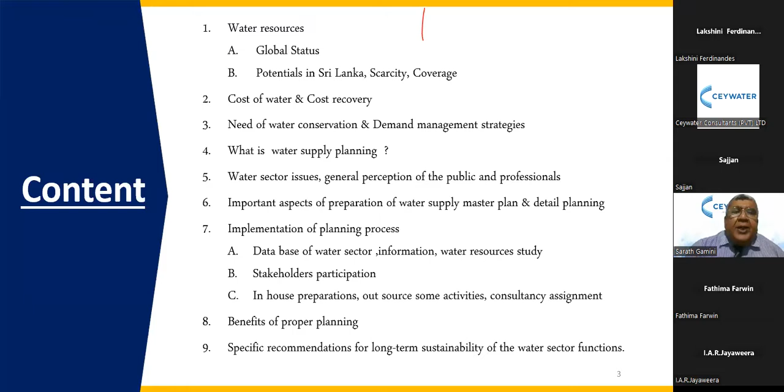I'd like to touch upon a few topics: the global situation of water resources, the Sri Lankan situation, then cost of water, cost recovery, and water conservation demand management strategies. I'll also cover what water supply planning is and how I look at it, then sector issues and people's perceptions, the important aspects of preparing a master plan, detailed planning, implementation of the planning process, the benefits of proper planning, and specific recommendations. So next we'll start with the water resource aspects, the global situation.

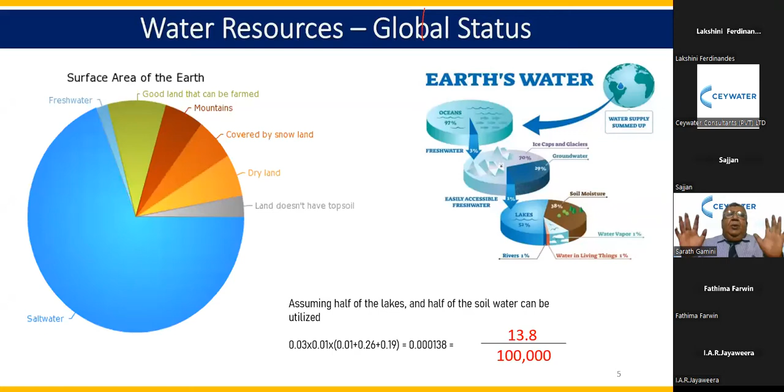There is ample water on planet Earth, but if you consider the total volume, 100,000 units, 1 lakh units, what is available at an affordable, reasonable price is only 14 out of 100,000. If you use seawater there's no shortage problem, but it involves 3 kilowatt hours and costs, on a Sri Lankan scale, about 200 rupees. So the global situation is also not so attractive.

Now let's come to the Sri Lankan situation. What we get is about 121 BCM, billion cubic meters, from average rainfall. Effective surface water used is about 50 billion cubic meters per year. For the water board, taking a sample, about 0.9 BCM is required at the moment, and in time to come it will be 2.4 BCM.

It looked like about 5% is sufficient to cater, but it is not so. There are some districts with severe water shortage. To explain with facts, I have taken the Mahaweli River Basin. Water Board has requested 500,000 cubic meters per day from Mahaweli, but they have given approval for only 300,000 meter cube per day. You will see the deficit. We have to find a way if we wanted to implement this. Mahaweli River flow at Peradeniya goes below 350,000 meter cube per day. So we are asking for 500,000, but on certain days it goes below 350,000. So in our country, we have a shortage of water, right?

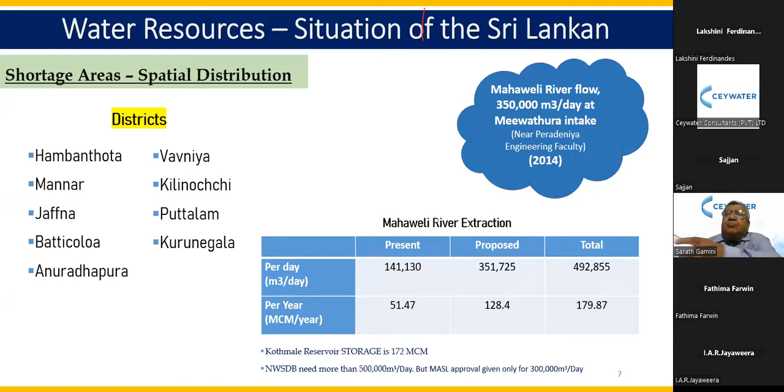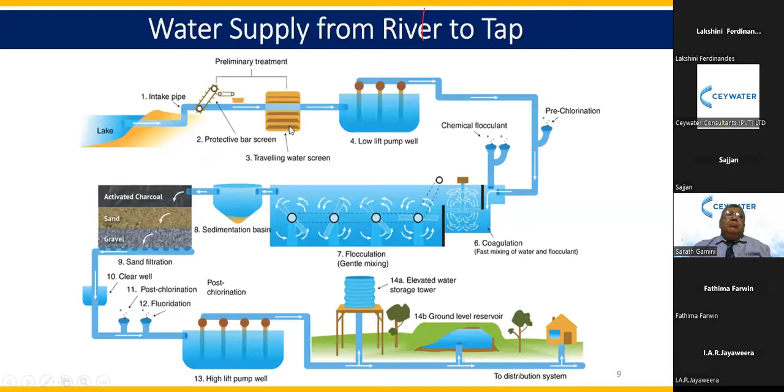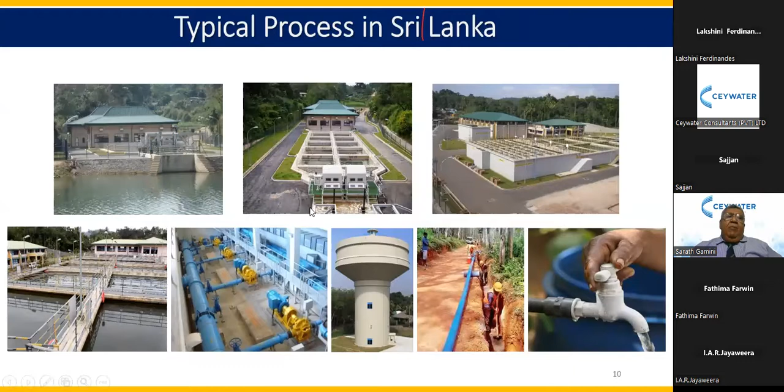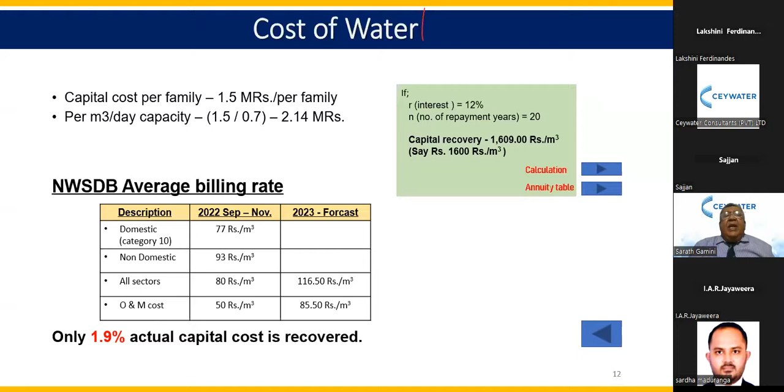That is the cost. So where we are - average cost recovery status. Very recently we increased the tariff. Before the tariff revision, the average billing rate - total bill value divided by quantity - was 80 rupees. We were charging 80 rupees. Now we expect 116 rupees going forward. But our O&M cost alone is 85 rupees. So we are recovering only 30 rupees towards capital. That means less than 2% we are recovering. In summary, we cannot recover the capital cost - only 2%, right? That means somebody should bear the costs. Entire Sri Lankan people should bear the costs. That is the background I am thinking about, and I am inviting the attention of planners. That is the status of water sector cost recovery.

So this is about the background, breakdown not required, so we'll go to the next slide. When we have a huge cost recovery issue, investments are rare or very limited. What should we do? In the planning process, proposal stage, we can propose demand management strategy. Another option is supply oriented - generally we have done supply oriented measures, like building more lanes and highways, similarly we can give more and more water supply. But our issue is we are short of capital and we cannot recover costs either. So we have to think of water conservation measures - demand management strategies are required. So that part also was in my mind when I was preparing this.

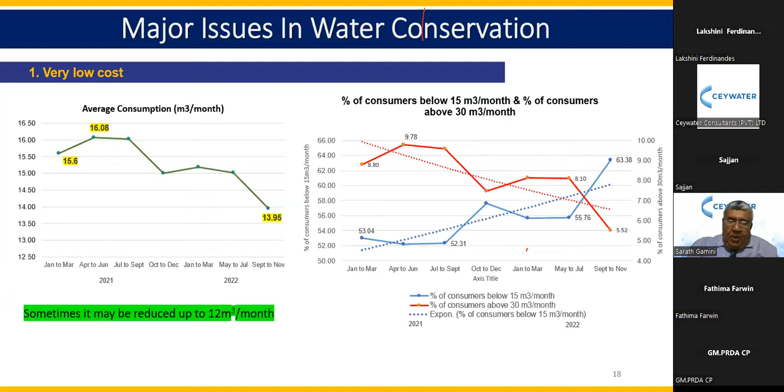So 76% domestic sector - mainly, the majority of water quantities go to the domestic sector. So we have to concentrate on the domestic sector, where it goes. Can we manage? Can we apply demand management strategies? How can we help people come forward and assist? The issue is that currently the average billing rate is very low, as I mentioned. Even after revision, for consumers using 15 meter cube, we are charging average 100 rupees per meter cube. Now overall average billing is 116. After the recent tariff revision, we observed that in 2021 average consumption of Sri Lankan families was 16. With this tariff increase, it has come down to 13.95, and with the latest revision it might go down to 12. Our senior managers found that the number of consumers consuming below 15 cubic meters per month was earlier 53%, now it is 63%. So demand management has already been enforced because of the tariff revision. But can we increase tariff alone? We may not be able to achieve it because there are other issues.

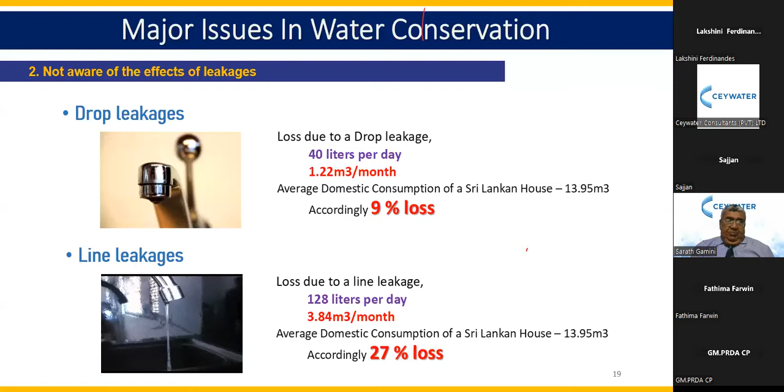So we have studied, Water Board has studied, where we are and why they consume so much. Below 15 cubic meters, 63%, then above 15, also 36% - a considerable amount of people. Mainly you can see drop leakage and line leakage. In the domestic sector, 9% of loss is due to drop leakage. If you compare with average Sri Lankan consumption, it is 9%. We have such drop leak and line leakage per month, and that is a huge amount - 27%. So these things are happening here.

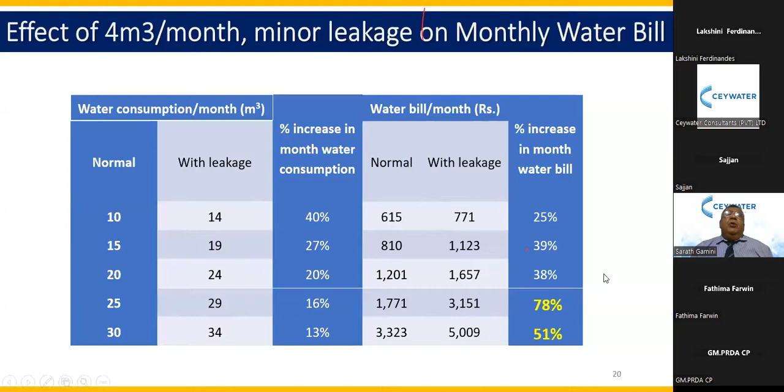So we have studied the water board, especially the steps they have taken to find out why water leakage and such losses occur. Two major reasons: poor quality water fittings—in the market you cannot find good quality fittings—and poor plumbing practice. The water board has taken a lot of action to make quality goods available in the market, so regulatory measures are required for water equipment.

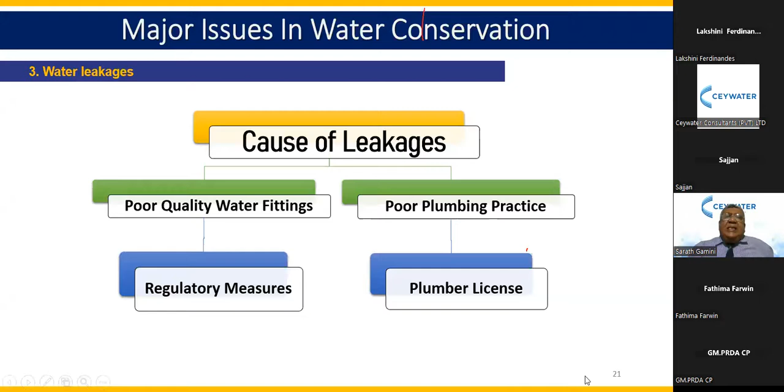So now it is being implemented. Plumber licensing also, with CIDA and other agencies, the water board is taking care of. These are the demand management strategies currently being implemented, to assist the consumer to reduce further consumption and minimize the losses.

Now one can say that per capita consumption, yes, we have to reduce definitely. Leakage, number one, then mitigating bad habits, that kind of thing. And the most important one, I was thinking to share with you all this evening, is what happened to our rainwater system.

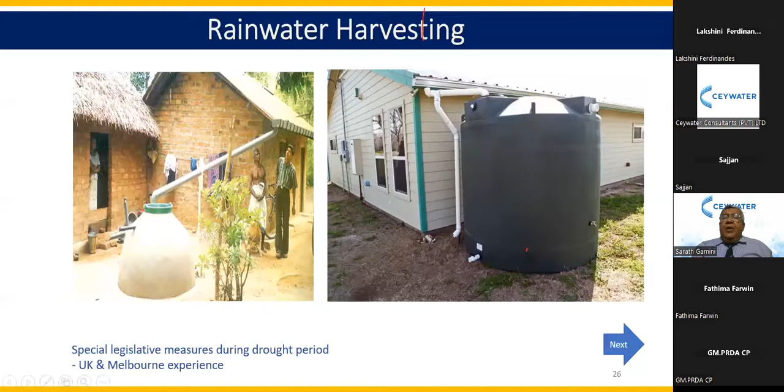We have been using rainwater, right? But in our country it is not compulsory yet. In UK, Melbourne, and Australia, it's compulsory—they have to store and effectively use it. So as an alternative, supplementary source, then shallow well, then hand pump well.

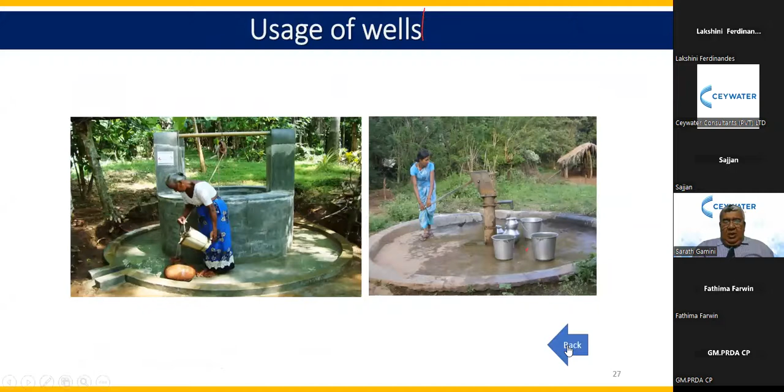So still 50%, we have to increase, say 50% or say 42%. So still we are looking for supply provisions, so we have to think of supplementary sources.

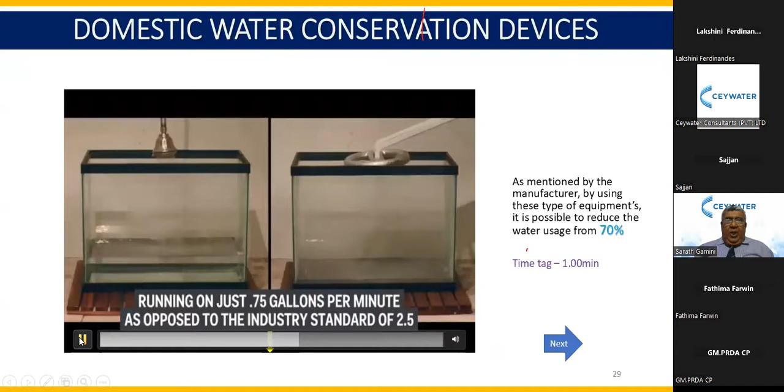Next item, I would like to share some of the things about water saving equipment. It looks like we have not seen this in our market, but the manufacturer says 70% of bathing water could be saved. So there are water saving equipment available in the world market, and we have to think of those measures.

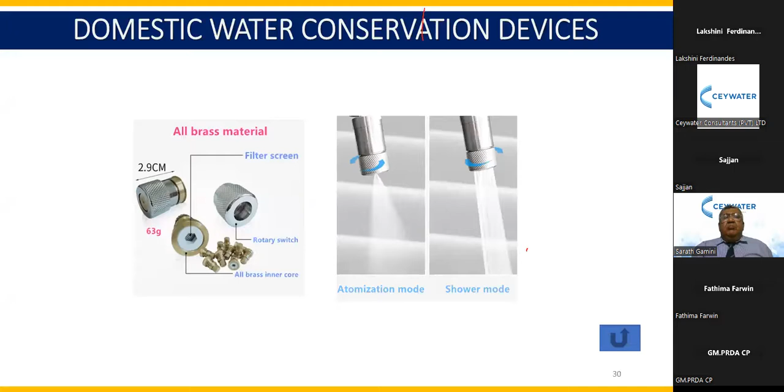One such thing is the atomization mode. Simply we can add a filter screen with a rotary switch. That's possible—this is a simple device.

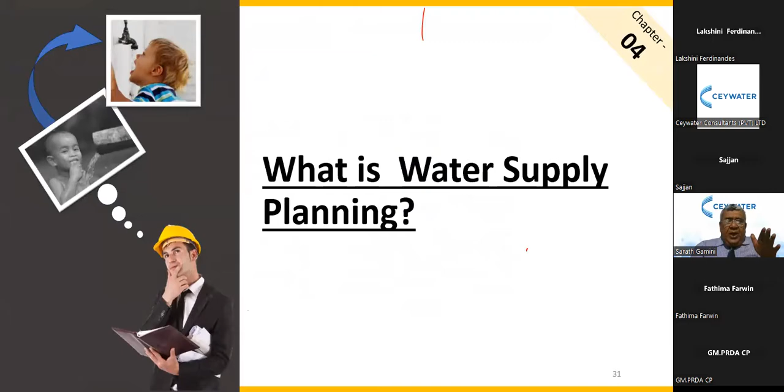So we have to encourage demand management strategies, conservation of water. Right, so that is what I mentioned right from the beginning. We should keep in mind that supply-oriented measures are limited due to various reasons, as I mentioned at the beginning. So demand management strategies should also go parallel. That is the background.

Now I am trying to go to the main topic. What is a water supply plan? There are so many definitions, but what I will say is it's a process—planning is a process where we need to give potable water to the people, ministries, industries, and various commercial institutions. It involves a lot of action.

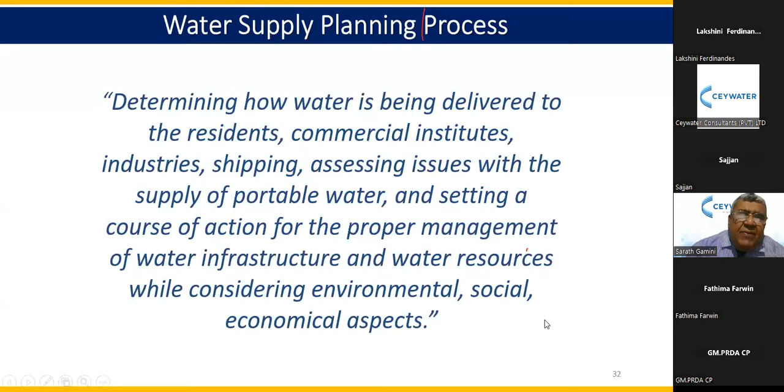Water infrastructure and water resources are to be developed and maintained, providing water supply while considering environmental, social, and economic aspects. So this is the definition—there are many definitions, but I have selected this one. It will have a lot of activities.

A list of activities—I just list out the majority of them. Demand projection and served area: we have to give water, how much, what are their needs. Everybody cannot afford piped-borne water. Then existing water sources.

Additional water resources required, then water treatment aspects to decide the treatment—what data do you require to collect?

Then energy, renewable energy use, community awareness and getting them involved, conservation measures, water loss reduction, water conservation, quality and quantity, cost recovery, long-term sustainability, low-cost solutions, asset management. All those things are involved in this planning process in some way.

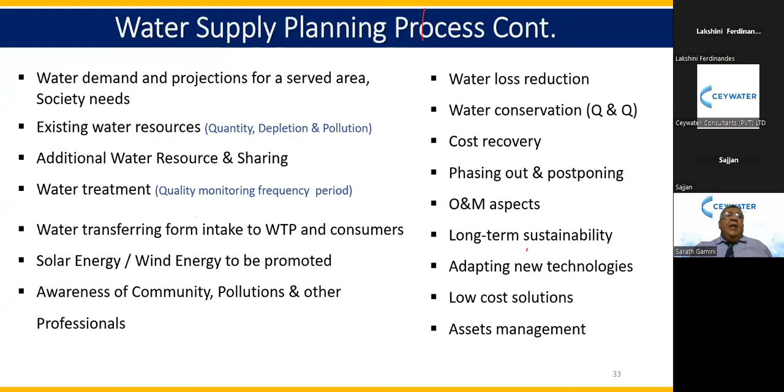So that is the important part—various activities and measures are to be considered for planning of water supply. Now, where are we? Water sector issues—I'd like to share some of the issues so that you, as a planner, can understand how we should react, how we should study these issues, and overcome them to give proposals.

Water resources, growing demand: we have surface water, groundwater, rainwater, reclamation, and seawater also, but that's quite expensive. On the other side, we have the issue of very expensive water resource development requiring huge investment. But groundwater recharging aspects should also be considered going forward.

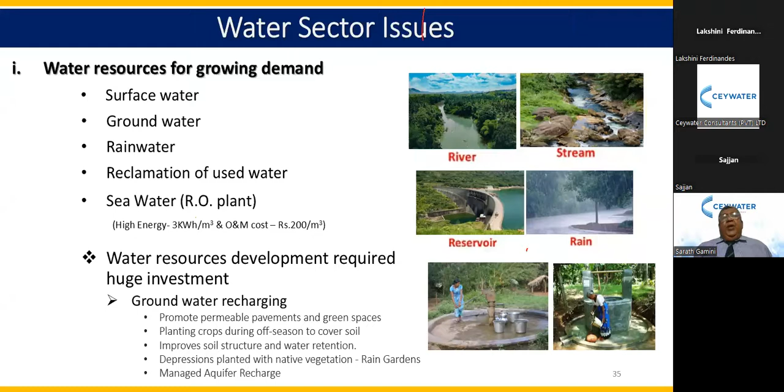One issue is the growing demand we cannot meet, so we have to think about recharging and soil storage improvement. We have to select one of these options: surface water, groundwater, or rainwater. So we have a lack of water resources as well as development—we have a shortage. That's a major issue in our country.

Then lack of capital, as I explained earlier. Then poor cost recovery - 1,600, but we are recovering only 160.

Then water losses due to various reasons, including water losses in the consumer premises. We also have an issue with water sharing with competing users.

Legislation methods are being processed now. There's less information and data on water resources - we don't have quantity, quality, good quality database. This is one of the major issues.

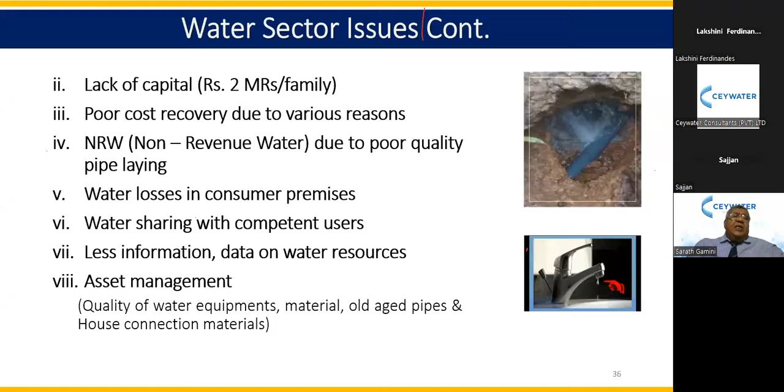Then asset management. Now we have some attention, but generally it's lagging as a nation in asset management. That is the sector issues and background.

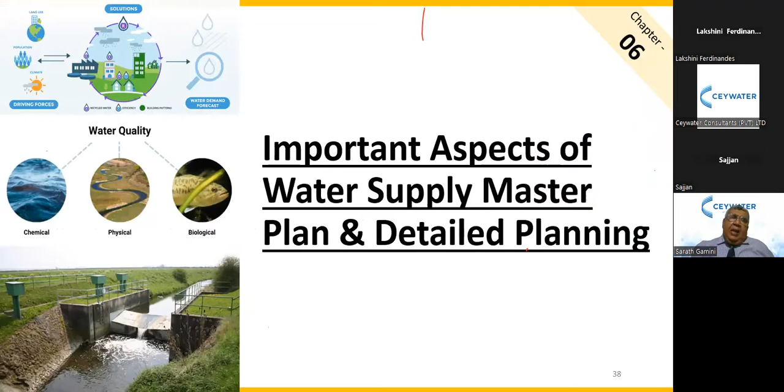Then per capita consumption - a few thoughts. Now those days we used to take 180 liters per head per day. We were studying this in university also. Now, remember that we are going on demand management strategies.

We don't have money to design and implement an overcapacity. We are trying to monitor the consumption. So we have to use existing billing data and allow for NRW, calculate per capita consumption, institutional demand, etc. So we must have a good database.

Planners should have access - those data should be published. Then served area, as I explained earlier, everywhere we cannot give water. Service level also has to be decided.

For example, taking my project, the Canino water supply project - there are hilly terrains, so we have isolated pockets where we cannot give water from reservoirs. We can give it, but you need an additional booster, which is very expensive for small families. So what are the possibilities that we could provide water supply?

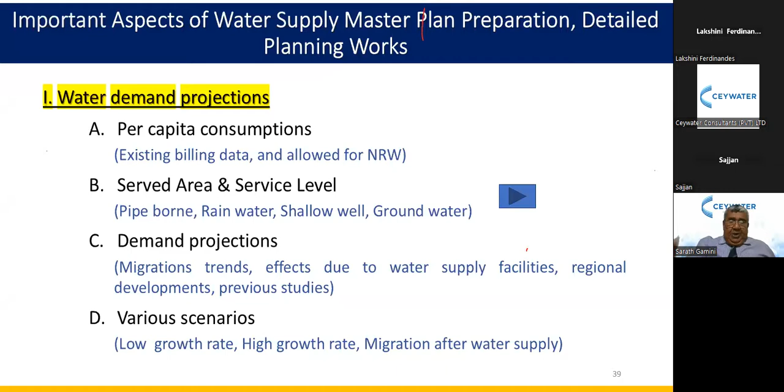So my recommendation is, as planners, with the assumptions and available data, you do a prediction and record it, and allow decision makers to select, or we recommend it. There is no other way. By doing that, you will feel how important historical data trends are.

We need a water resource inventory - quality and quantity data, and groundwater also. Because if we are going to do planning in one year, we cannot do it - we have to have resource databases.

Then quality and quantity monitoring, very essential - river stream gauging stations. There are a lot of dams across various streams and rivers, so why not have gauging stations? The irrigation department is not bothered, so we have to have our own stations.

Then next one, water resources already being used. When you are proposing, there are other users - farmers, electricity power generators. So a sharing mechanism is required, and sometimes we may have to pay compensation.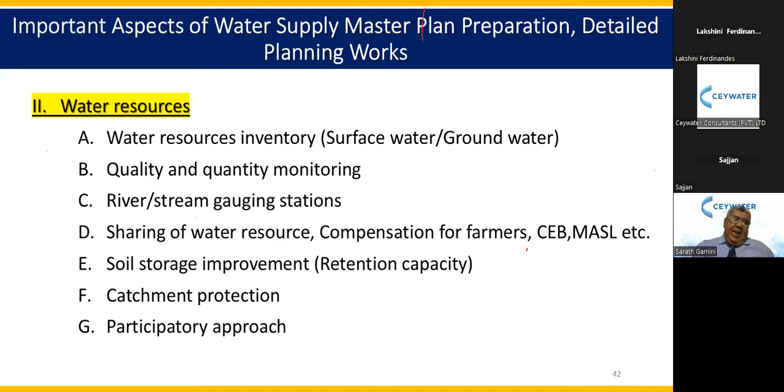We have to adjust ourselves. Then soil storage retention, soil storage improvement when you say water resources, then catchment protection and participatory approach. So when you do planning, we must not consider it only hardware, software part. Soil stage improvement, catchment protection, and we have to do it with a participatory approach. Those things we recorded and put in our report as evidence that the planner has done their best to come up with the recommendation and conclusion.

Then detail one, intake. Recently I was asked for a few comments about the intake. If you finalize the source, location of the intake, it's very important. We'll take this one, Mahaweli, somewhere here, we have to find it. Most important part is water should be available - dry season, rainy season, flood, dry season, whether the river goes to this side or the other side, and pollution threat.

Remember, the biggest polluter is the solid waste dumping yard. Very unfortunately, solid waste dumping yards are located close to reservoirs, rivers and streams. So pollution is not that simple to treat. Sometimes they won't treat it. Then industrial discharge, agrochemical pollution - all those should be considered when selecting the location.

Then if you go for the dimension and type, you have to spend a little money. You have to do hydraulic analysis, physical models sometimes. We have to spend money to do a quality job. We have to do it sometimes in advance - we may not be able to complete within one year. Historical data we have to collect, river meandering, changes.

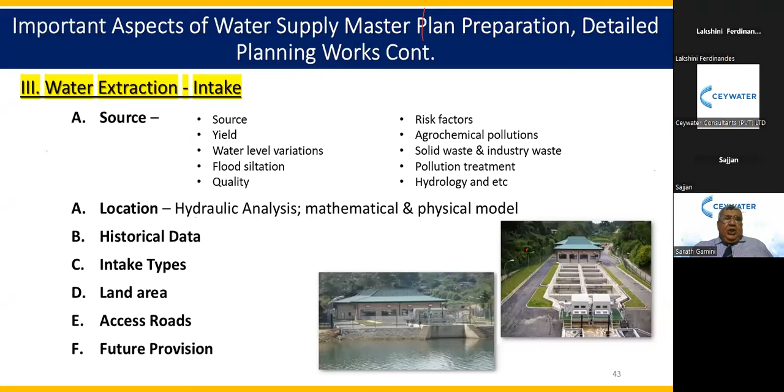Then water treatment plant. To decide the type of treatment, you need quality variation data - it's not just a couple of readings. We have to monitor it, especially high turbidity, its frequency and duration, whether it is 5 hours or 10 hours, whether this comes once a month or once in 3 months. Those quality variations are required - it's not only for one year, we have to study for a long time.

So we have to have our own database, easy to access. Then we have to have a database. So to do the planning, we have to - the institute itself has to collect the data and store it, and it should be available.

O&M aspects - now we feel that we have technology and had to introduce high-tech. Cost of maintenance, repair maintenance, reliability - that's all also to be considered. Then type drawing use, it's good - we can use type drawings, but as mentioned, previous type drawings, we have to review depending on effectiveness.

Then land area - we have various treatment plant types, right? Slow sand, you can go up to the plate settlers, chemical treatment. So area is varied, so we have to select the investment required and the land requirement. Then sludge treatment I just mentioned because now EPL has to be obtained. So these aspects to be considered. Always keep future provision.

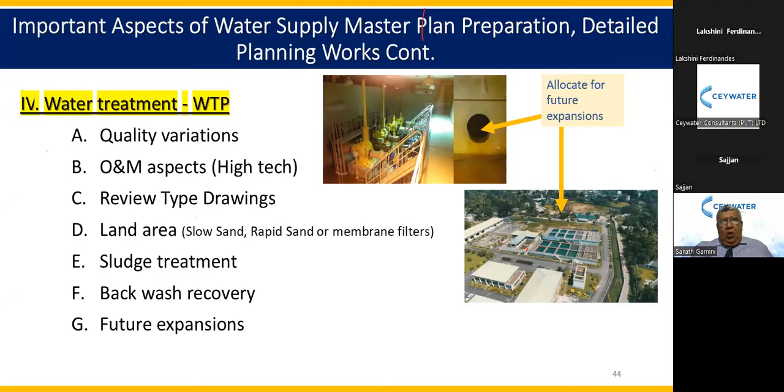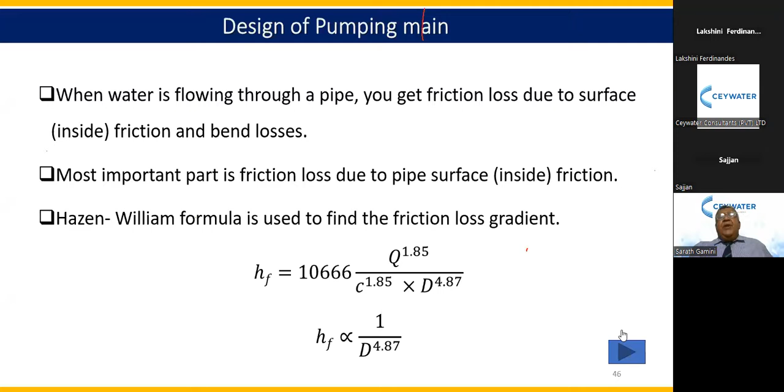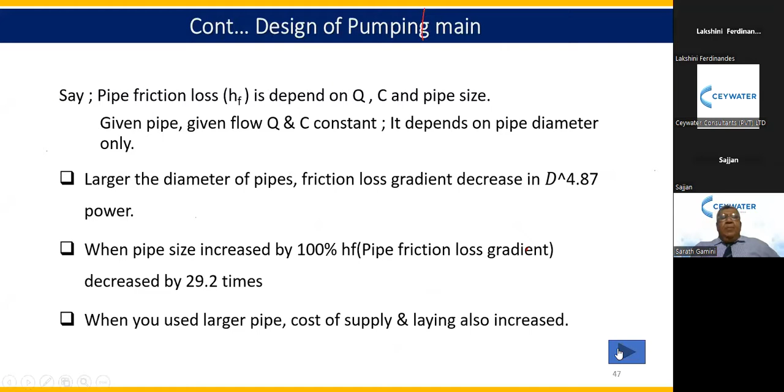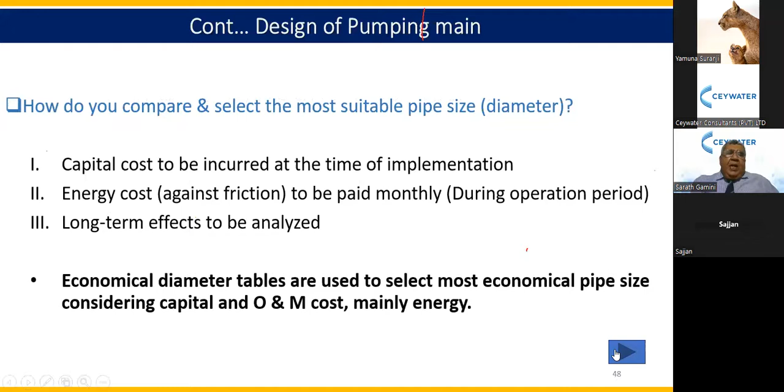At the same time, capital investment is high. But capital investment comes right from the beginning, while friction loss and friction energy come later. Then, sometimes if you increase the diameter double, you can reduce the gradient by 29-30 times, so that is not a linear relationship. So how do we compare? We have to develop such tools to apply to find the best investment value for money. So capital investment comes right from the beginning, but O&M cost will come later.

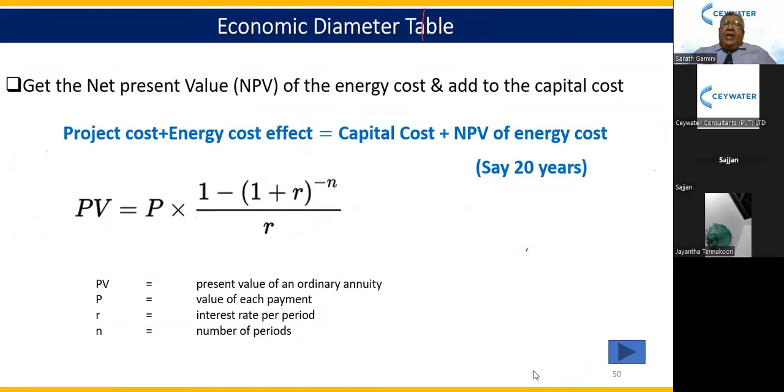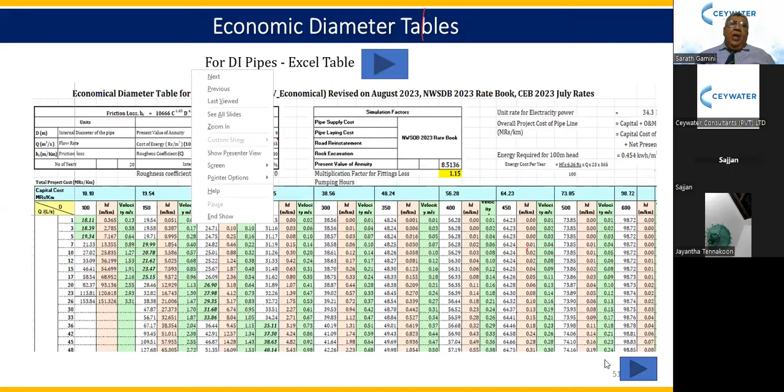Then compare the accuracy of the data. We will do a sensitivity analysis. We are not going to give an A-level paper answer. We have to see what information we have collected, accuracy, sensitivity, variation, and decide yourself and recommend with reason.

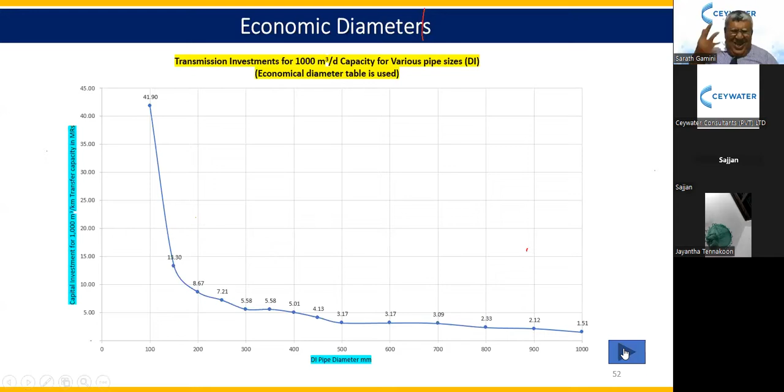Due to time limits, I've given a small theoretical graph. This is investment in millions for 1,000 cubic meter per day capacity, function of capacity, so investment per kilometer. It's gradually decreasing from 100 millimeter diameter, 41 million, down to 1.5. Just to show you, the larger the diameter, the carrying capacity is extraordinarily high. Keep that in mind, since going to the next diameter is not a big cost.

This is a table where I'm trying to show how we can get the value for money. Do the calculation. I've used that formula, and for a particular pipe diameter, you get the friction loss gradient, velocity, energy, NPV, then capital, and total as the last column.

Are we going to install 100 or 150? Sensitivity analysis needs to be done, whether we should go to the next diameter. What is the cost of laying really? Road damages, if you go to the next diameter, what will happen? This is just only 1.5 million in repair, so planners should think twice.

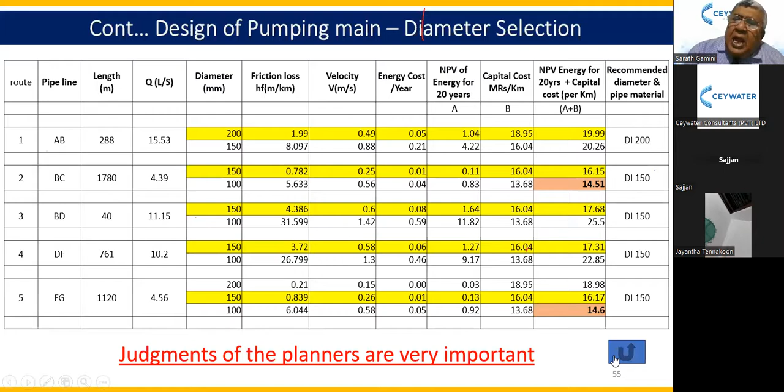Use expansion probability. You must think about various scenarios, and finally you have to do the recommendation. That is enough to highlight the role of the planner. This is our time; people are waiting.

Keep future provision, especially for transmission. Having a second line in the pipeline is simple, and consider alternative routes. When you are proposing a pipeline along a road, think about alternative routes also, since sometimes small gaps are there beside the road. These are the alternatives we should consider, rather than going on the main road, try to avoid it with alternatives.

It is not only the pipeline reinstatement cost after construction; it affects society, traffic jams, all that. If you have data, we can calculate. So the idea is to think independently, consider all possible sensitive scenarios, and weigh and decide.

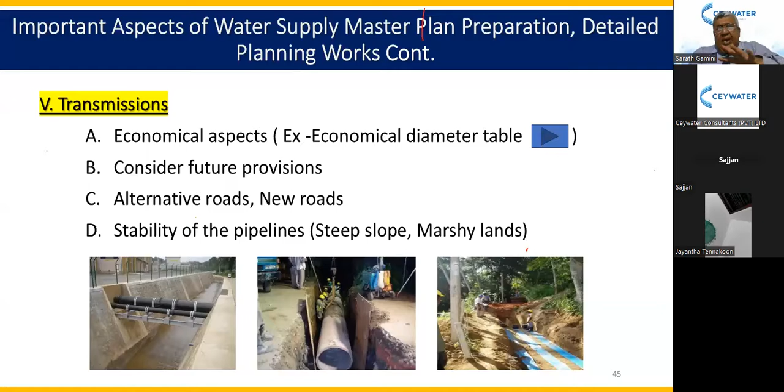That is what planners are supposed to do. For that you need data, so as a group we have to prepare, collect, and share the required data. So now we are going to the distribution system next.

Various houses, various locations, different situations. We need to have a good road map. Invest for a road map, a road map with footpaths and steps. Those are very important.

Otherwise, sometimes you will miss the poor people living on hilltops and by roads; they might not be able to get water. So we have to prepare this. This is a sample of what we prepared in Kandy. So pipeline for 1 kilometer may be 10 million, but per square kilometer at that time even you can prepare for 1,25,000. Why don't you invest?

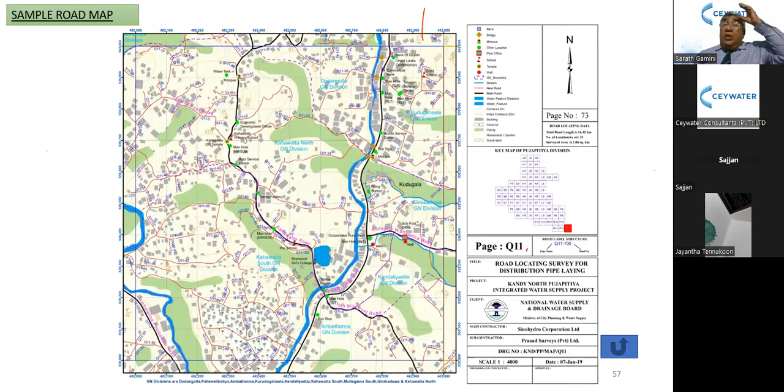Road density is about, sometimes, 5 to 10 kilometers. You need 100 million to lay the pipeline, but you are not investing 150,000 for a road map. The electricity board has the location of houses, even with addresses. Why don't you make use of those maps and data and prepare nice maps? Easy to plan, easy to plan.

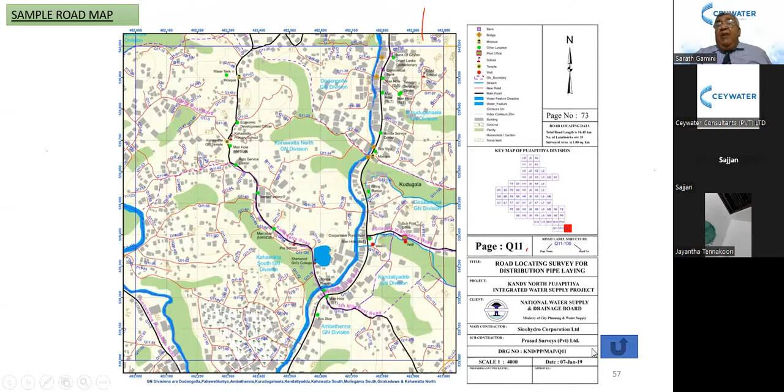We have done it. Investment and benefits, you cannot compare; it's a huge benefit. We know where we are, and we know what we are doing.

Then, with the road maps, new areas there, then existing distribution system also you can put it. Then nodal demand - we can think of demand density, meter cube per day per kilometer. Based on existing data we can calculate, and consider future trends. Demand density may be suitable to decide the nodal flows, or else we can think about the catchment area of trunk main. That's one scenario - so many methods our engineers know, and we have to develop and share with others.

Still, I am telling that isolated pocket story, it is there. When you prepare a roadmap, it's easy to find. So, as I mentioned earlier, next reservoir or rainwater - you have to include those areas separately.

Then I have given in item G, trunk distribution line. Very often when you go through the distribution system, you will see that from the reservoir a little bit far away, for the high elevation, it's better to introduce a trunk distribution line, separate line HGL to the end. You will realize by comparing - if you do the calculation with different options, you will realize.

Then isolated higher pockets, as I mentioned, this is where next reservoir, adjoining reservoir - I have explained. This is very useful and variable speed, of course, maybe not suitable for Kandy terrain. In case you have to feed it to the highest elevated point, flat area, long distribution system, so sometimes we can save energy at non-peak hour versus peak hour. So we have to run it and see.

Start with Anuradhapura - I can remember planners first started doing this one. This is another idea - instead of having a large reservoir and high pumps, think about a variable speed pump station.

Then next one, very interesting one. After the pipeline, again we are digging for house connection. Whether it is possible to give house connection during the distribution system design stage, planning stage - keep the provision, plus or minus there. But time to come, we have to work to consider, allocate house connection provision, and innovative system to protect that, to avoid illegal connection.

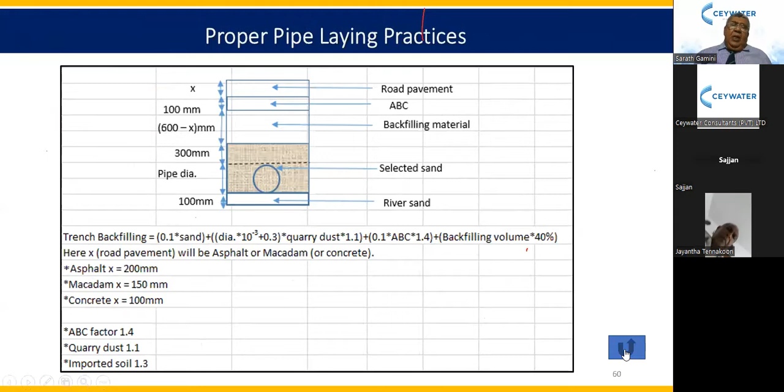So proper pipe laying practice - I put this slide there because at the planning stage we have to have a separate chapter, quality goods and services chapter. Recommend them for long-term sustainability and reduction of losses, etc, because we are coming to a very crucial situation, we are lacking capital and foreign exchange. So do it for quality.

Right, so that is about distribution system.

Then already 40 minutes gone. Right, implementation of planning process. Now we are in the implementation stage.

Database, as I mentioned, information - this is required in the implementation. We have to do it in advance. As an institution, we have to prepare in advance. Stakeholder participation is a must.

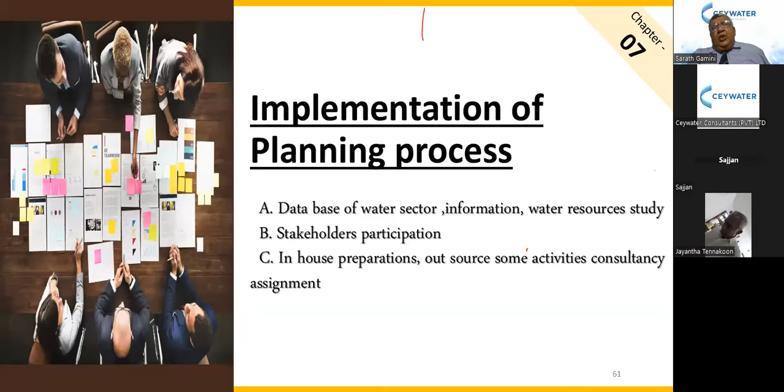Then, of course, certain studies, research - one thing the institution can do. So implementation modes I am talking about - you can outsource, you can do consultancy action, surveying, roadmap preparation, flow measurement and studies, and river runoff model, rainfall runoff model. Those things are possible - we can do it, or else we have to think of outsourcing as well.

Then I have selected a topic myself - get ready in advance. I was telling you, advising you about the advance. During the planning process, we cannot do it - no ad hoc projects. Get ready in advance, collect information.

Water resource inventory, I have explained. Demand centers - why not do it? Take studies and invest some funds to prepare maps early, and do quality quantity analysis, and get ready, establish the database.

Identify potential sources, and make the public institution aware to protect future sources.

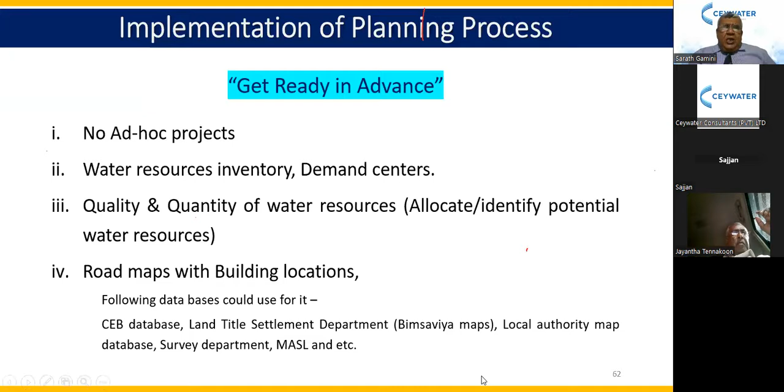Roadmap with building location, already I have discussed, mentioned. CEB database, Bimsaviya - there are certain areas, local authority maps. Those things are possible, it's available. Make use of that and prepare roadmaps. My topic is get ready in advance.

Then water resources - there are various agencies, stakeholders: irrigation, Mahaweli, agrarian service also - they are doing water resource development. They have a plan, they have a project pipeline. Those information should be collected in advance and should be available with index for the planners, right?

Whether they are maybe consultant or in-house, what is required is wherever the published reports are available, collect and invite - that's what I'm telling, data information sharing. We can buy it, still work, and we can share our work and create a culture of sharing information, willingness to provide, share our data. We do flow measurements and give the data to others, and quality, quantity, others.

Then last item on this action - cost of raw water in O&M budget. When you do planning, we think that it's the proposal, hardware - no, always, it is in our guidelines also. We have to include in our O&M budget all possible risk factors and implications. Now, time to come, raw water costs might come, so why don't you add it? If raw water costs need to be paid, then this much money is required. What is wrong with it? Just write down and estimate, then give the cost.

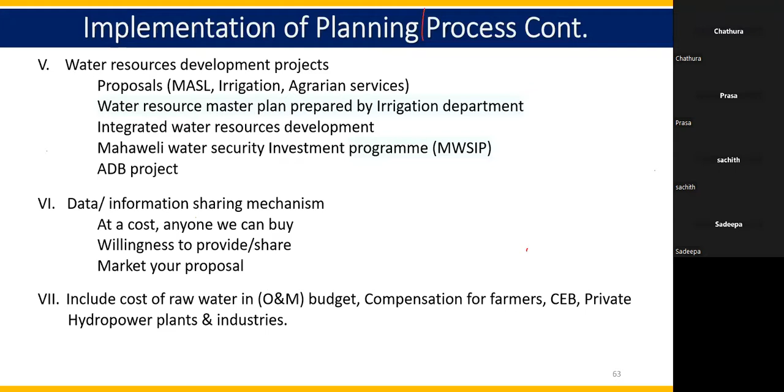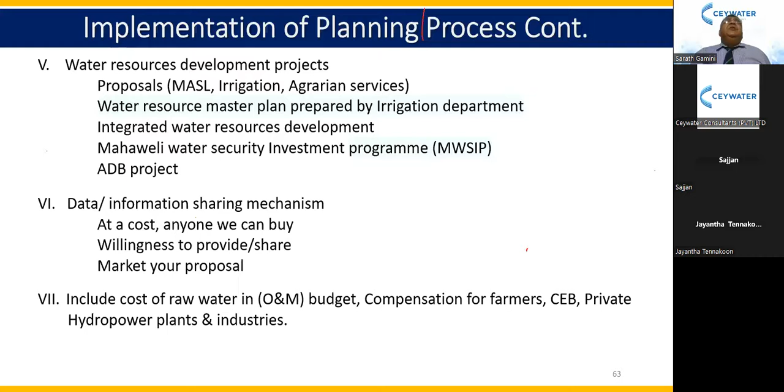I have put a topic as identify potential water sources. When you do this planning work with roadmap and all, demand centers are identified, then we have to identify potential sources.

Then most difficult part is negotiate with the users and formulate agreement. We have to do it very in advance. This is not after signing of the loan agreement, we may not be able to do it. When you start, sometimes we may not be able to get the intake. Others we can do. So for better water resources, we have a mechanism, compensation, negotiation mechanism, so we might be able to do it in future.

Then I am just suggesting, always land is a problem. Land required for the water infrastructure. As we have potential water source and demand centers, identify treatment location and reservoir and try to reserve. Lot of advantage, and people also very happy.

Even politician will be happy. Reserve land for treatment plant, future tanks, whether it comes or not. At least start with Land Reform Commission, Railway, JEDB, Mahaweli, some temple lands. So we might miss such good location and finally end up with very expensive land development, needing alternative land development and access roads etc. So best location, you could reserve it.

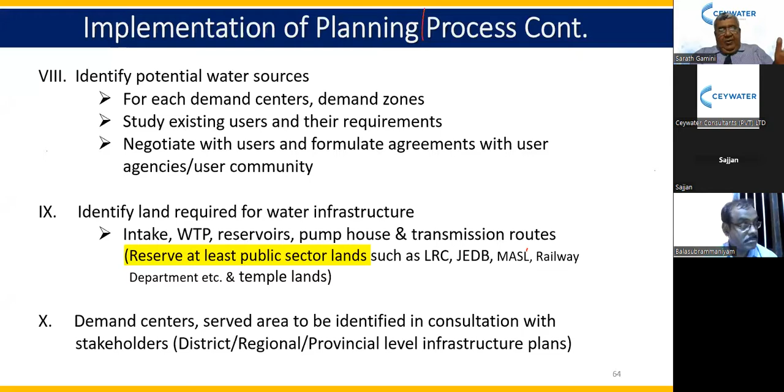Then I have mentioned demand centers, served area to be identified, consultation with stakeholders. Now we have a department called National Physical Plan, they have prepared plans. Then at district level we have, in time to come, division secretary level also they have plans. Provincial level, infrastructure plans. All those things to be collected and inventories should be available for our planners, private sector or our own in-house.

Then again I am mentioning rainwater harvesting zones, groundwater usage. We should not kill the rainwater system. This has been there, and we have to promote it now, high time. And groundwater usage and improve the groundwater storage. Now we have shallow well improvement. Demand strategy should be implemented.

So I have put that last two items, general public awareness - that is very important. Role of citizens on water sector issues and management. University colleagues, university students and academics, technical college students and their lecturers, they all should know, especially politicians also. We should tell them about water supply planning, how expensive it is. We have sector issues, cost recovery issues. We have to make awareness. That's a must.

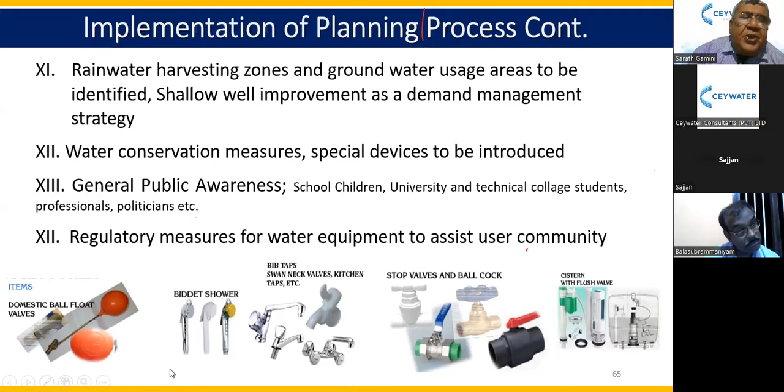Whole problem is we are trying to hide things which should be published. It should be published. Then regulatory measures I have already touched - important measures to be implemented and should be included in our planning process.

Then if you have done good planning, benefit - roadmaps available, other sectors also could utilize. We can prove that we have planned very well. This is rainwater area, this is shallow well area, this is where we can give water. These are the phasing out, so this will be implemented in 2030. So we can market our proposal and explain to others why we cannot do certain things.

Then integrated approach, complying with legislative requirements. We have archaeological clearance, CEA clearance. Then water issues to be resolved. Those things are very important because it's a part of our legislation. So especially public sector projects, we have to comply with. It's a kind of demonstration through our planning report that we have already taken action.

Then I am trying to highlight overall economical aspects. This is the 2006 procurement guideline. Even the 2017 procurement guideline, it is mentioned there - overall economical aspects.

More often people, our professionals and administrators think that overall economical efficiency could be obtained after preparation and submission of bid documents to the tender board. It is impossible - that's halfway gone.

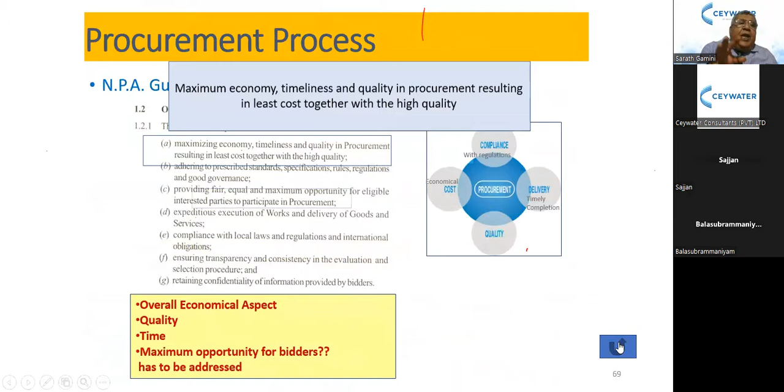Now we are surviving with all difficulties. So now itself think about what is economic cost, what is economic evaluation, how we can achieve, how we can give value for money. That is an important factor. That is what I put aside also. Overall economical aspects should be considered.

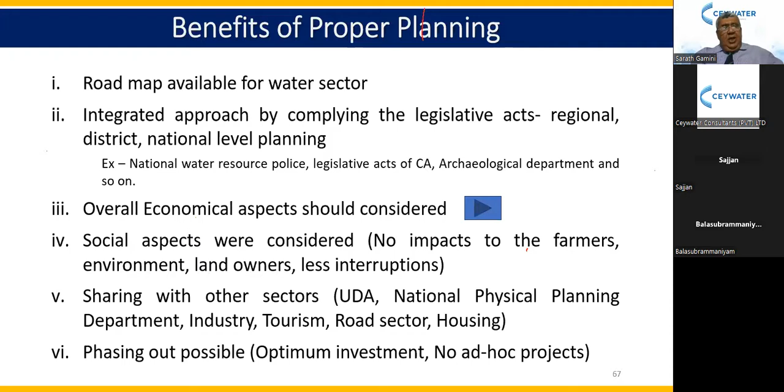Then I have put phasing out as possible. This is very important, phasing out. We cannot give average for all. Consider the difficulties and the available funds. Phasing out program, phase out, very important. Think about it during the planning stage: stage 1, stage 2, stage 3. But certain structures like the intake can be built to final capacity. So this is where everything is in the planner's hand, right?

Now 53 minutes. Okay, 7 minutes more.

So I have given, trying to share very specific recommendations. I have discussed and explained a lot of things, but I need to concentrate on one thing: database. In advance, we have to prepare it and share it. We have to get it from others also, with an index, and it should be available for the whole entire nation. No harm for planners, various decision makers, administrators. Why not? For auditors, everybody.

National investment - so why don't you share that investment and those reports? Consult everybody. I am telling, requesting, appealing for an inventory of studies: how much of the feasibility report, design report, O&M manual, as-built drawings we have prepared. Those things should be available, otherwise it's very difficult to do further planning, and sometimes operation and maintenance also becomes difficult. So we need the habit of collecting information, inventorizing and storing it, not like earlier days.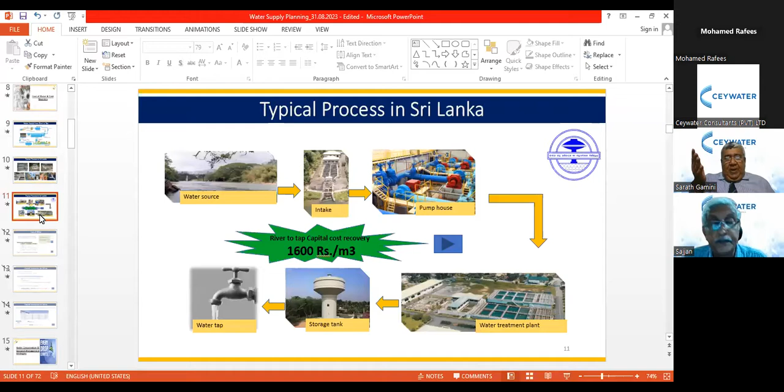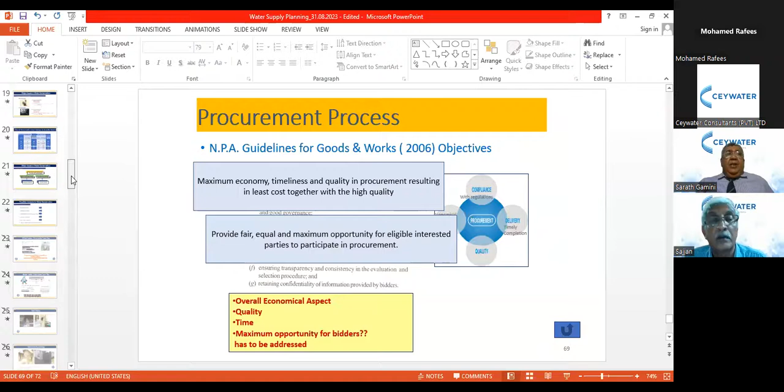Okay, I will share the slide. For capital cost, I have given one scenario assuming a 20-year life cycle with loan repayment also over 20 years, just to demonstrate the cost ranges for planners. Imagine it is 1,600. If you go into detail, for 40 years, generally structures and transmission mains sometimes last more than 100 years in effectiveness. Our O&M structures may last 60 years, and transmission mains maybe 50 to 60 years. So I took the example of 20 years just to demonstrate how expensive it is.

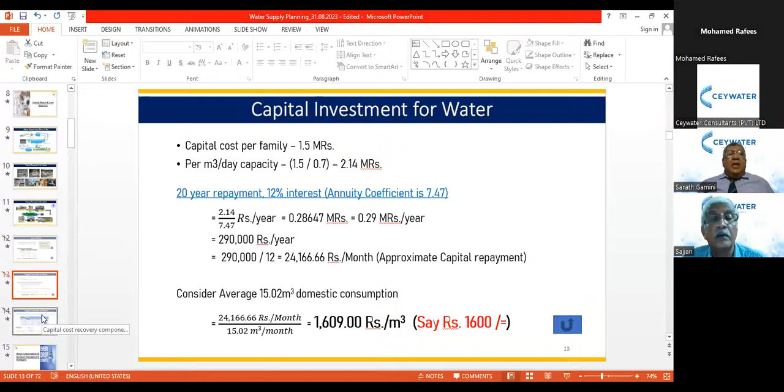Now, for example, with a different interest rate, I can share a table. At 8%, if you have 40 years, it comes to about 1,000. If the loan is available only at 20% for 40 years, it becomes 2,300. For 20 years, it becomes 2,500. So we can do this calculation and show it to the planners and decision makers, this is the real cost of water. Depending on the lifetime, for example for pumping mains, you can put 50 years.

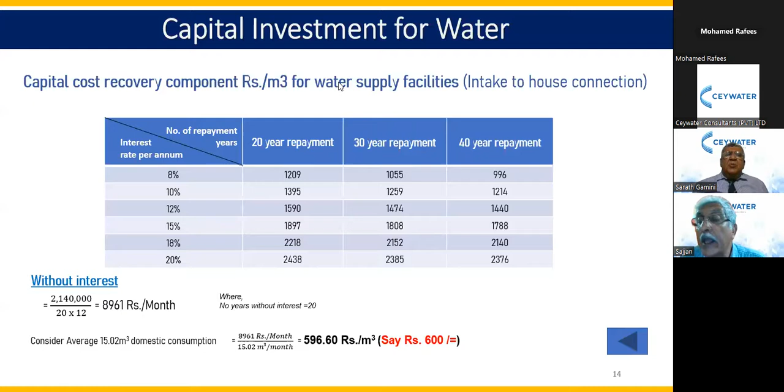Thank you. Let's move to the next question by Mr. Daya Gamage, our good friend. He says: I propose appropriate automation, smart metering, and remote reading possibilities of water meters, and meter reading without conventional meter readers, can be suggested for cheaper water production.

This is mainly a proposal, and I hope you will comment on it, Mr. Gamini. Now, also investment and benefit, or all economic aspects, need consideration. Smart meters may be suitable for large, valuable customers. For small scale, we have about 2.7 million customers, so investment versus benefit matters. Even if you get the reading every week, what are you going to do with that reading?

What is the prediction? Is it worth it? There are large consumers worth monitoring, to check whether they have illegal tapping and such. So smart metering investment and benefits need to be analyzed. Better to start with a pilot project and see.

I just want to add, Mr. Gamini, probably the automation part to increase the reliability of the process, supporting the treatment process operators. Maybe those are also things I'm sure we can help with, right?

Then the next question is by Mr. Balasubramaniam. He's asking, is it better in future to allocate quantity of water per family according to the number of members in the family?